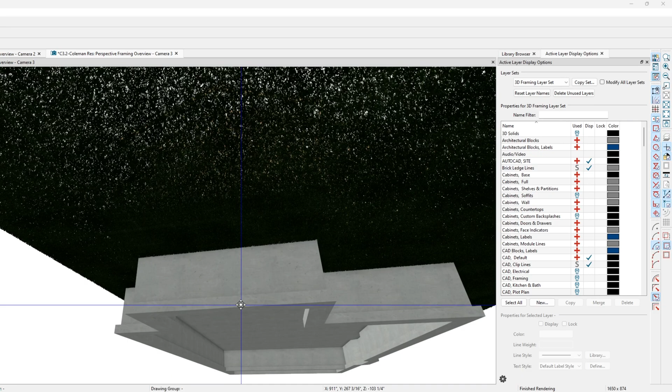It's wonderful. So we're under the house right now. This is the foundation - standard 16-inch wide footing, 8-inch stem wall, 42-inch deep for our frost zone. Whoa, I didn't click inside the model first, so that didn't move very smoothly.

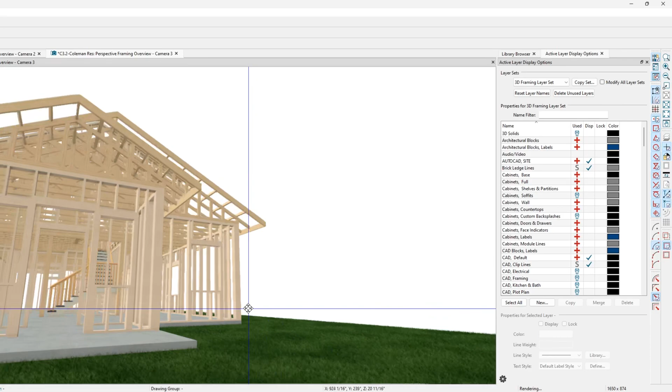So that was us below grade there. As I come up grade, we can see the structure as it is so far. Got some corrections and stuff, but we are in preliminary design phase. I know that this had a lot to do with cost analysis of how much this is going to be to build, so I've made some decisions on how it's to be constructed.

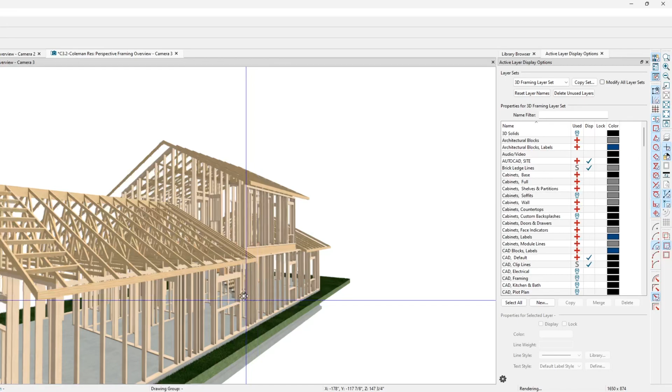Certainly open for suggestion. When we get down to it, all the corrections will be made, like that doesn't need to be there.

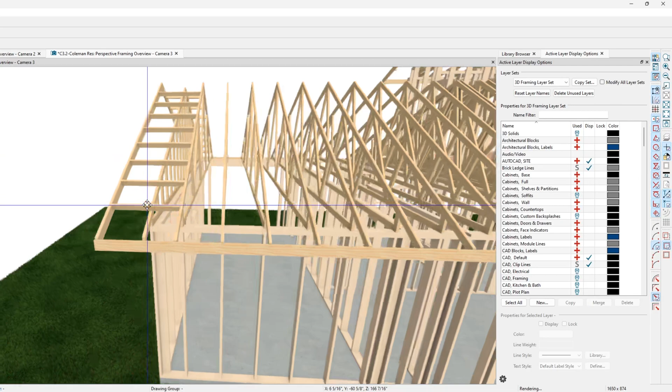And then the lookouts, sometimes I like to drop the second one. So I have 2 drop trusses, and then I'll bring my outlookers back to this one, allowing more backspan, because the general rule of thumb for us structurally is 2/3 backspan. I've got more out in the overhang than I do in the backspan here.

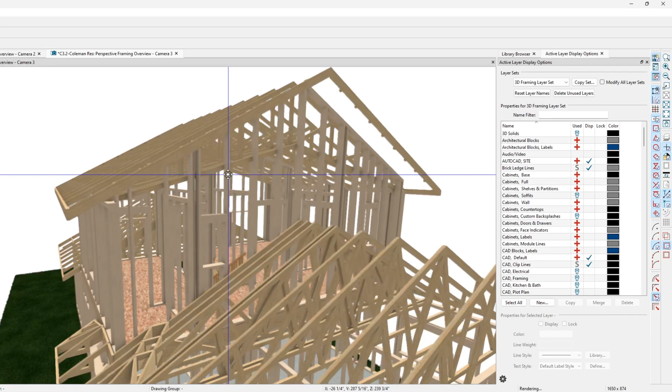And when we get to that 2-foot overhang, which is really something that we need here in Montana because of the UV and because of our icing that occurs on the edges of our buildings - we promote 2-foot overhangs. I don't know why it did what it did here, but it didn't give us a drop chord, and it didn't bring my outlookers all the way back. So corrections like that will be made, but let's get our design going first.

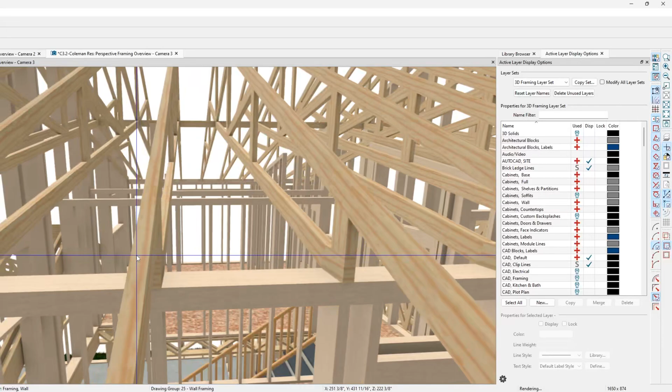And then, boy, look at that. That's kind of weird, I don't know. It almost looks like this wall... I'll have to look into what happened.

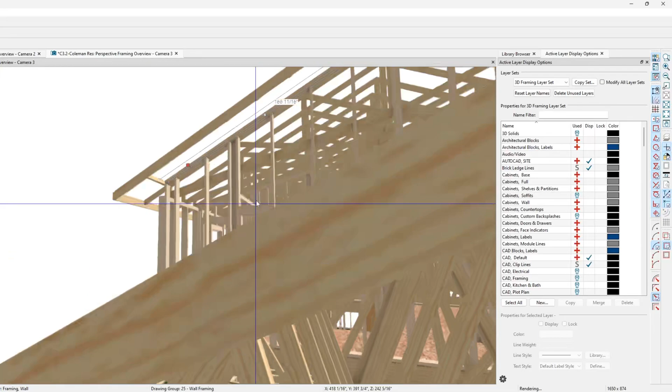Oh, I do know - when I was in the previous video, I noticed that inside this garage down here, there's an exterior wall. There was siding inside the garage, but that's not where this is occurring. I just have to go through and see what's going on, because to me it looks like this wall is bearing, and maybe that's why this is building funky out here. So I have to go through the program and see what it's determining.

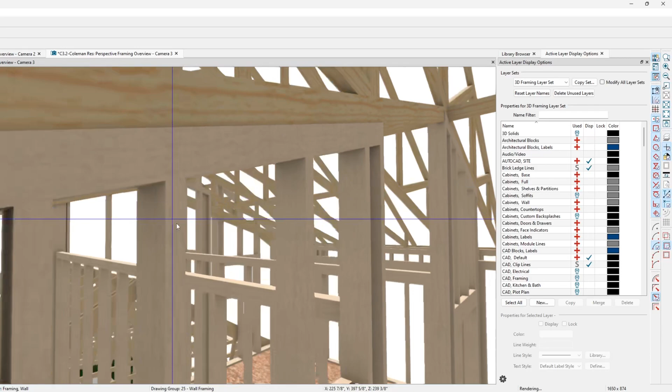But these are scissor trusses for the upper story, allowing for more head height on an 8-foot plate. And I'm using a pre-cut stud, so our bottom sill or top subfloor up to the top of the double top plate is going to be 91 1/8. And then I've got a 12-inch energy heel on this thing.

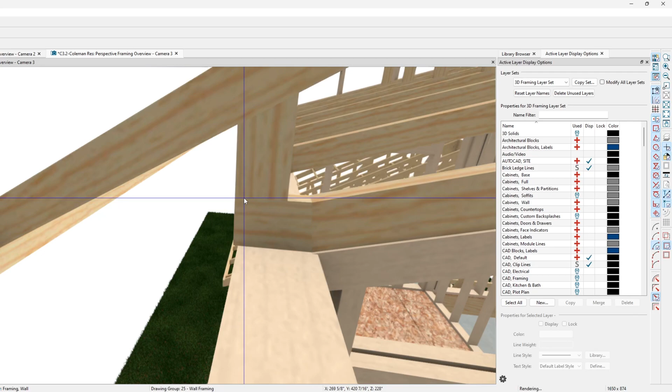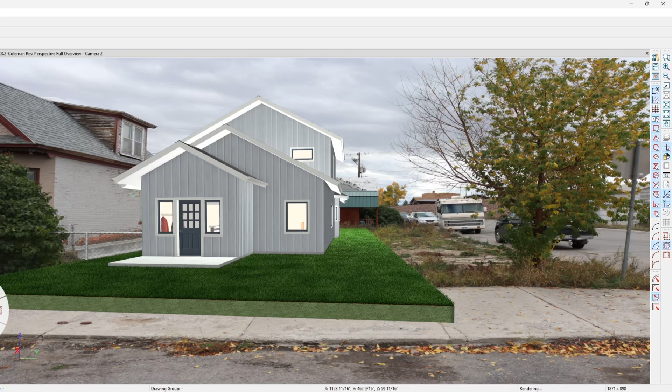So from the plate straight up to the top of the truss, this point right here - let me turn... point right here is... close - oh, I didn't mean to close that, but that's easy enough to get back. So we just have to get back to where we were, which was on this energy heel.

So the distance from there to there is 12 inches, and that'll let us get an R49 if you use a high density fiberglass insulation blown in. So, yeah, all these guys - unnecessary.

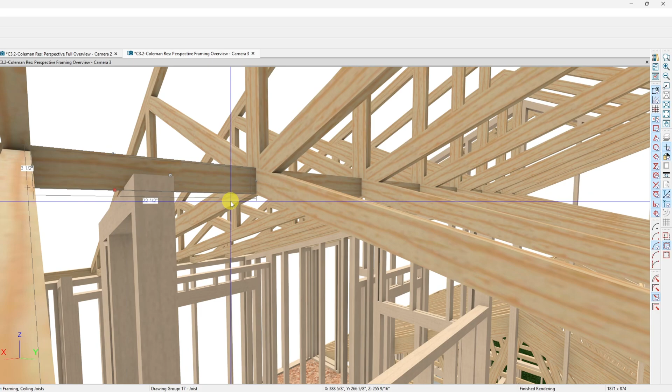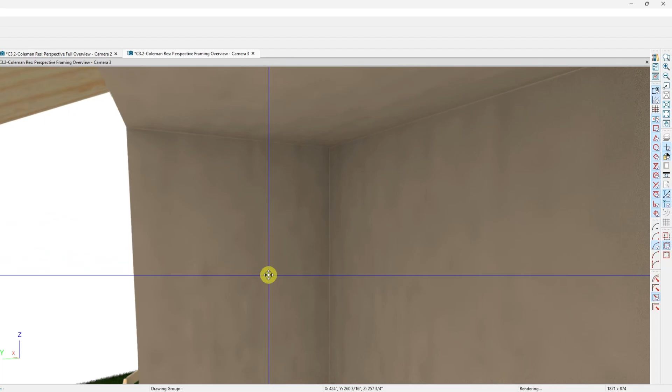But if you want to have blocking in between your trusses - or actually, sorry, that was not unnecessary, Control Z, bring that back in - because I need a nailer for my drywall. So you can also talk about stud corners and how you would like those built compared to what I typically do.

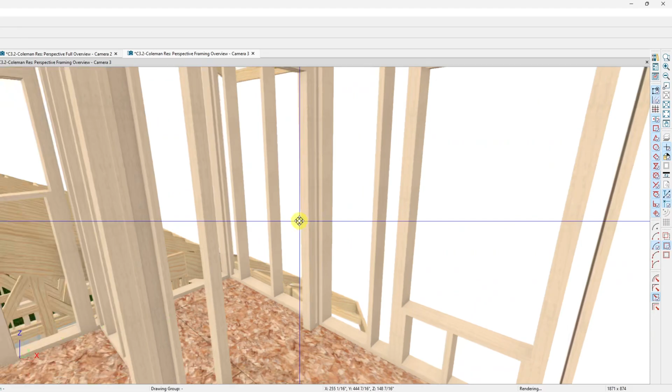And minimize the stud corner, but still give you drywall backing. That way we get more insulation, but you still have a place to attach the drywall sheets. So I haven't gone through on a model like this and put in backing for your cabinetry and stuff like that yet.

But 4-inch concrete slab, don't know why... oh, because I turned on floor finish. The slab wasn't showing up without the floor finish layer on, and so it's showing the carpet on the stairs.

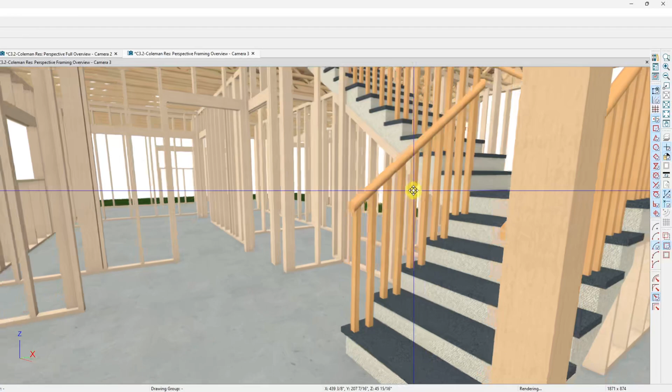That was put in there as an accent, and I tried to have as little baluster work as I could afford. There's the walk through to that storage where the stuff was underneath in the laundry room.

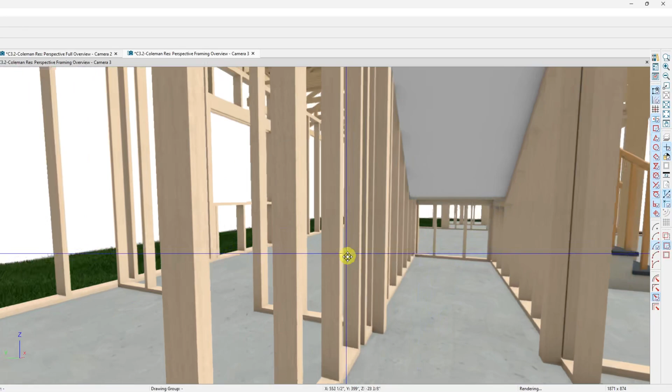So this area here is that laundry room, and washer dryer there. There's the entry, and then storage under the stairs for mops and vacuums and all that jazz.

We're in the music room now. Flat ceiling, 9-foot plate, and then this is on through the kitchen.

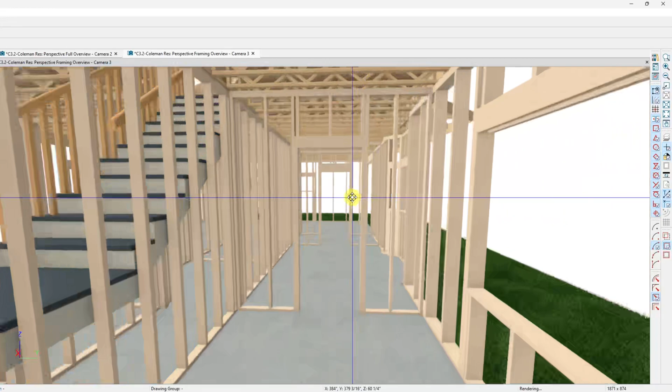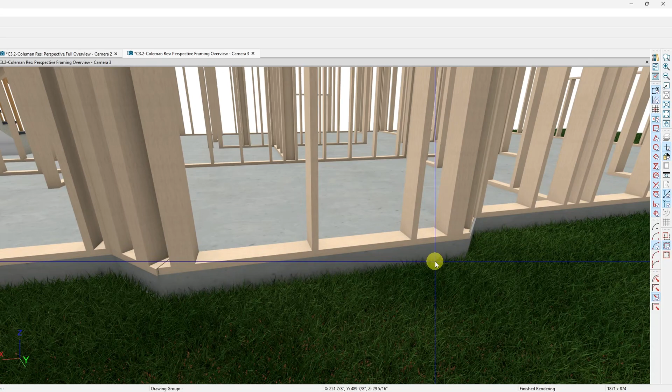And here, Nick, this framing won't even go to the ground. It won't go down this far. We just need... she wanted to have an extended countertop and a place to put, probably even a raised countertop, because she wants to do herbs in the window for sunlight. I don't know how well it's going to work because this is north-facing.

But to put all of her beautiful windows, dining room, and all that stuff to look at that neighbor - this is literally the edge of the property from my evaluation, without getting information back from someone.

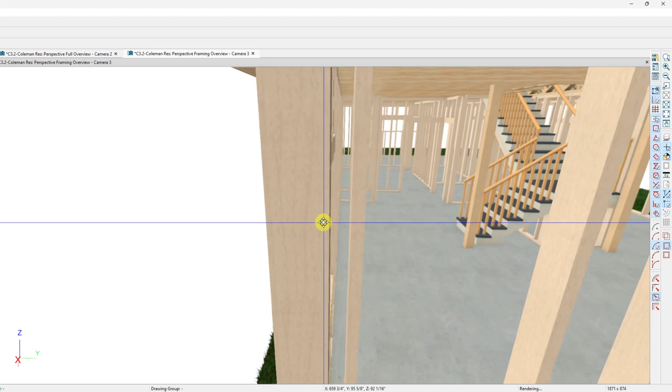So this is actually their property, that shape that we're seeing here. So this is where that shed is now, that they're considering moving.

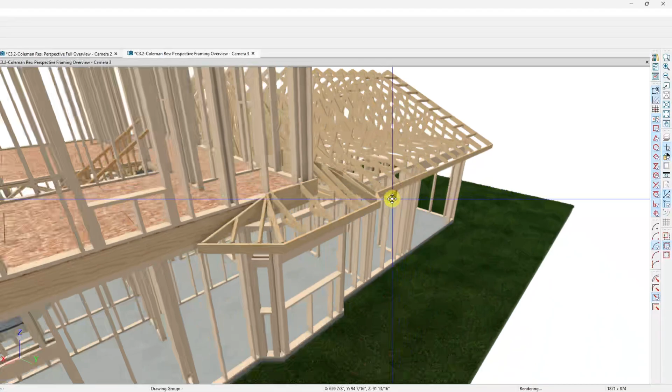If we go with the design that's similar to this, we won't need that here. I don't think I need this roof to build over this, and we can build something a lot shallower. I do like the 2-foot overhangs for protection, but I have a roof over a good portion of it. Wouldn't call it all of it, but boy, it's a lot of it.

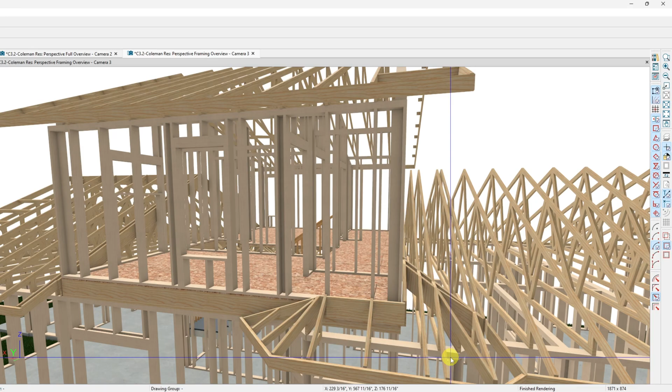So it'd just be this corner, and if I reduce this back to, say, a 12-inch overhang, maybe 18, I think... sometimes on small bays like this it looks like it's too much. And then your thoughts on going ahead and hanging the roof right across here to break up that big wall line that faces.

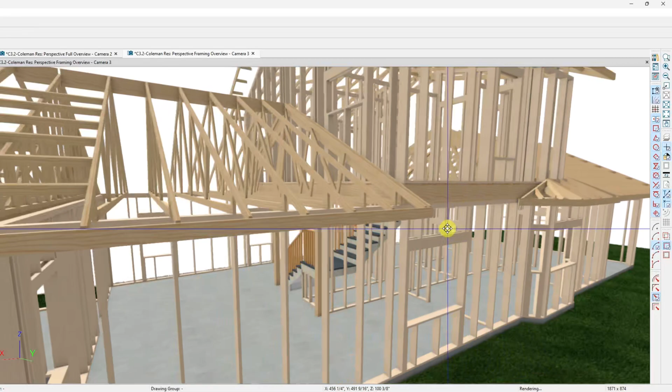But again, that's something that comes down to their budget versus what you want to do. And then I'm not sure what it's doing here - I had some sort of a return going back in the roof. You can see that possibly in the 3D video. I forget if I showed that off, but it's incorrect.

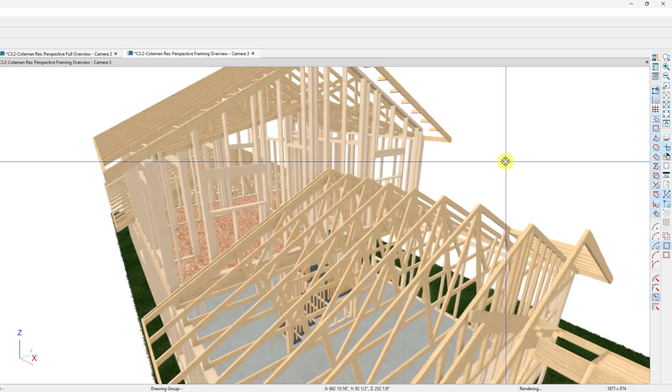Let's get through the preliminary design phase, and then once we get done understanding what this building's floor plan and such will look like. But I wanted to give you kind of a heads up on how this particular structure would be built, if that's helpful at all in your guys' discussion of cost.

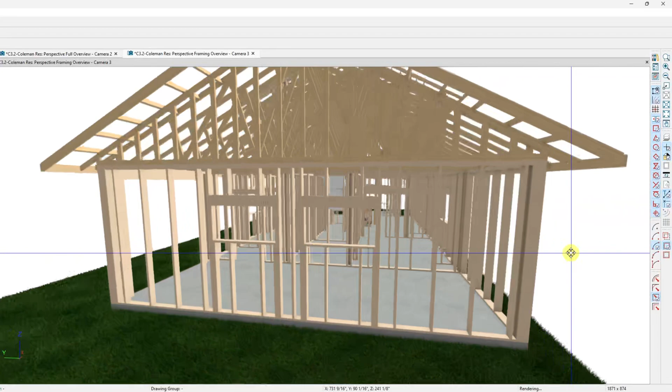And these two windows on the garage are awning style, so they'll be hinged at the top, opening outward in case he forgets them and leaves them open. It won't rain or snow in there unless it was completely blown sideways.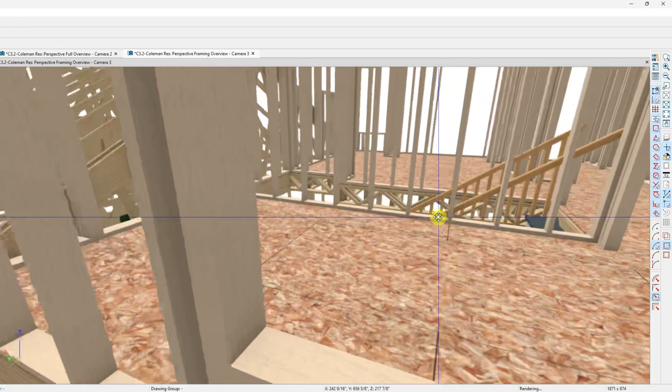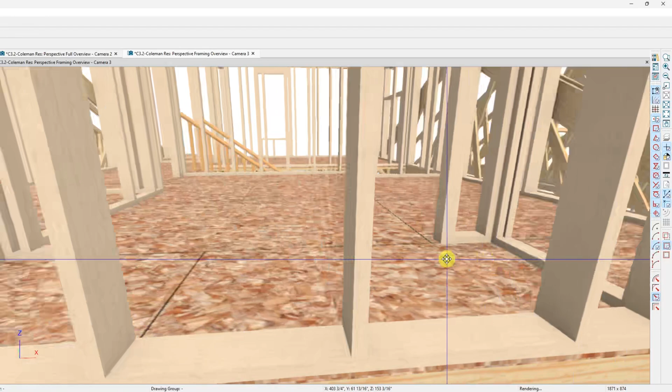So, anyway, I'm not a big fan of OSB, and in some of my designs that have a better budget, I replace all this with plywood. So you guys can talk about that. I just - if you get it on and get it covered right away, it'll last a long time. But sometimes that's just not possible, and the stuff ends up getting wet, and it can't stay wet for too long of a period of time.

Anyway, this is for your use, and hopefully you find it beneficial and pretty informative as to how basically to build this structure.